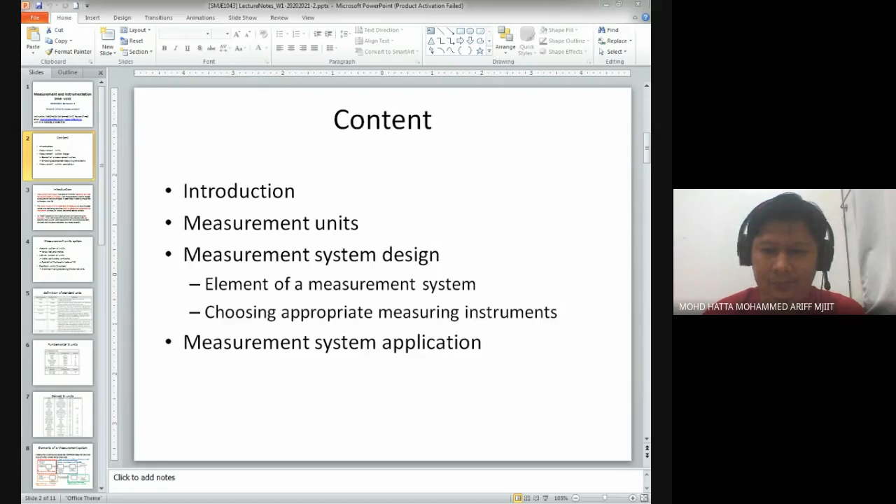Okay, as an introduction, here it says that measurement techniques have been of immense importance ever since the start of human civilization. I agree with this statement, and I believe Omer also agrees. It gives the example of a ruler; it's a very traditional measurement technique. When measurements were first needed to regulate the transfer of goods in barter trade in order to ensure that exchanges were fair. I agree, doctor.

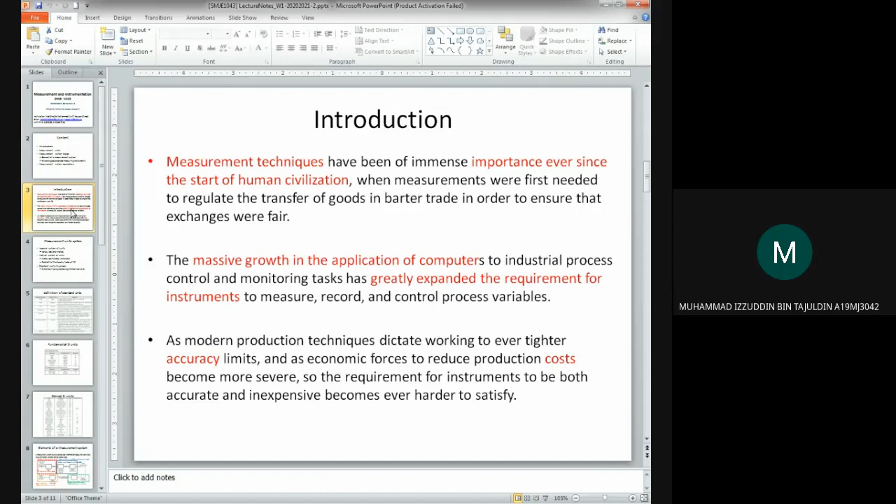Do you know what barter trade is? Yes, I know that. How is it performed? You know, when we try to buy gold with fish, right? Yes, you switch things, doctor, so you can get that other thing. You give someone fish and you will get gold. Is it a fair one? No, I think maybe not. You will give that person maybe the same value of things. The trade should be done in a fair manner.

But I think for a measurement system, if you try to measure people in terms of their height, in terms of their weight, we have a fair instrument. I mean, to know what is the weight and also what is the height of a human or any items that we try to measure.

Okay, next point. The massive growth in application of computers to industrial process control and monitoring tasks has greatly expanded the requirement for instruments to measure, record, and control process variables. Of course, with computers, we can do a lot of things. We can control our measurement system, and we can control our instrument. We can control in terms of monitoring as well. So the growth of computer technology has benefited measurement techniques and also

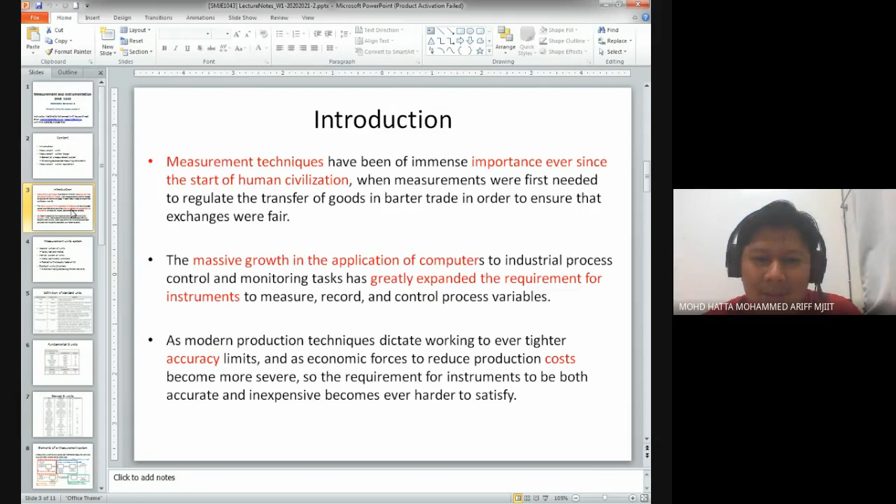instrument technology. And as modern production techniques dictate working to ever tighter accuracy limits, and as economic forces to reduce production costs become more severe, so the requirement for instruments to be both accurate and inexpensive becomes ever harder to satisfy. I also agree with this statement. It's difficult to satisfy people as well as satisfy the requirements of, in this case, measurement.

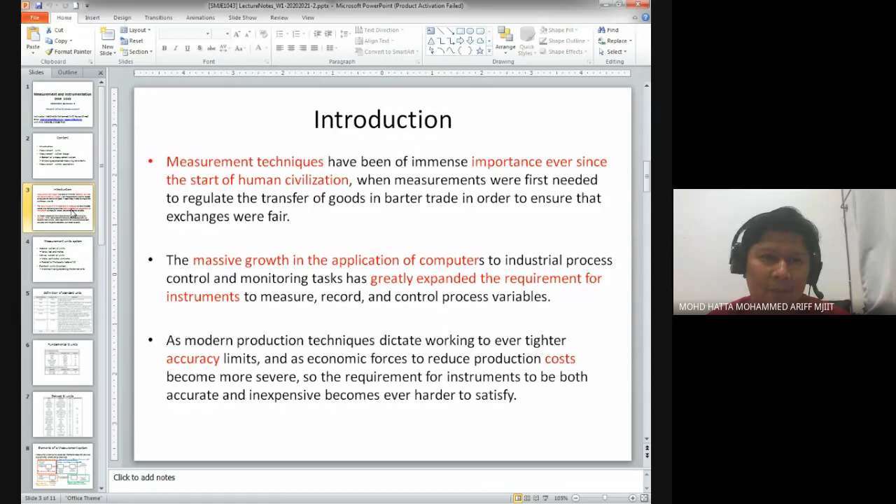So there's a trade-off between cost and accuracy and also technology as well. So you need to balance, you need to compromise all requirements in order to get what you need in your measurement as well as in your instrument. So you need to have something which is accurate and at the same time less expensive, so that you can have better performance as well as resource sustainability.

Okay, measurement unit systems. Last time, if you look at, I think not last time, nowadays also, the imperial system is used widely, and I believe in the US they like to use yards, feet as well as inches, and I think in the UK as well.

For the metric system, we know that we have meter, centimeter, millimeter, measurements related to the base factor of 10. For example, if you would like to have a measurement of 1 kilometer, that means 10 to the power of 3 meters, right? So in the metric system, we usually use a factor of 10, like kilo, centi, milli, something like that.

And for the standard unit SI, since we have two types of unit system, one imperial and one metric, we also have a standard unit system known as the SI system. This system was created to avoid confusion in expressing the derived units. Normally, in our course, we try to use the standard system. For example, if you try to measure weight, we're not going to use pounds, we will use kilograms or grams in our SI unit system. You need to go back through this definition later on based on the materials that I will provide later.

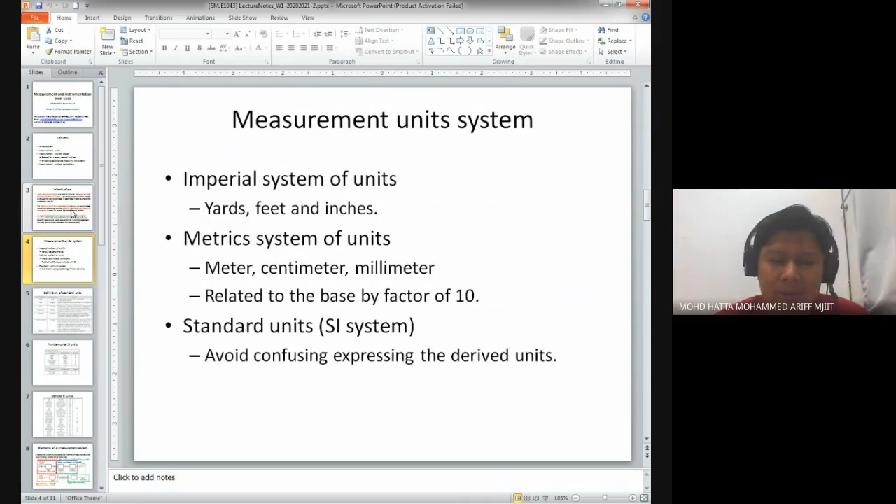Right, this is the definition of standard units. If you look at length, we have meter; mass, kilogram; time, second; temperature, degree; current, ampere; luminous intensity, we have candela; matter, we have mole. So this is the definition of it. So later on, maybe you should read all this and try to understand or remember what is meant by kilogram, or what is meant by length, meter.

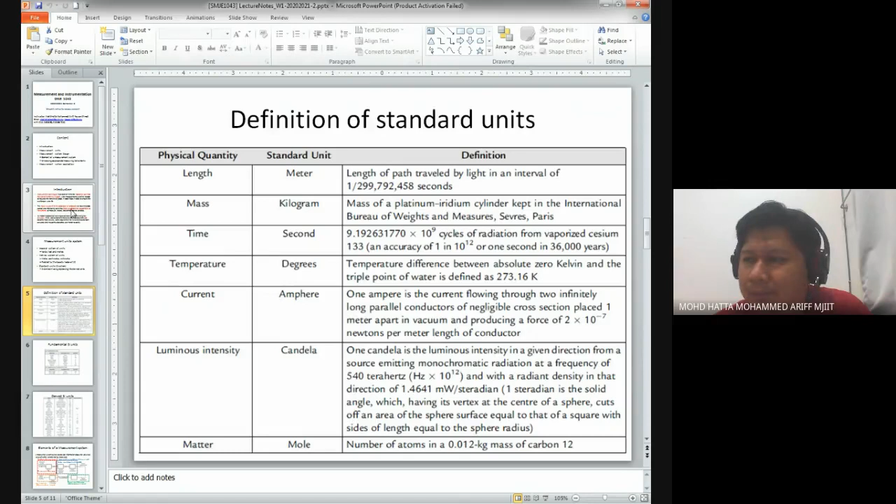Okay, also for the fundamental SI units, we have quantities, standards, as well as symbols. For the supplementary fundamental units, we also have plane angle with the unit of radian, and also solid angle, steradian. And normally the symbol should be like this, rad or sr.

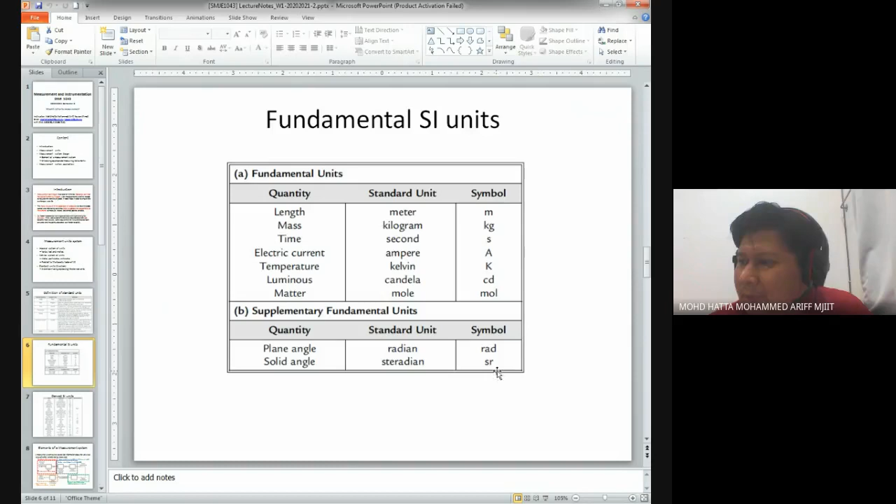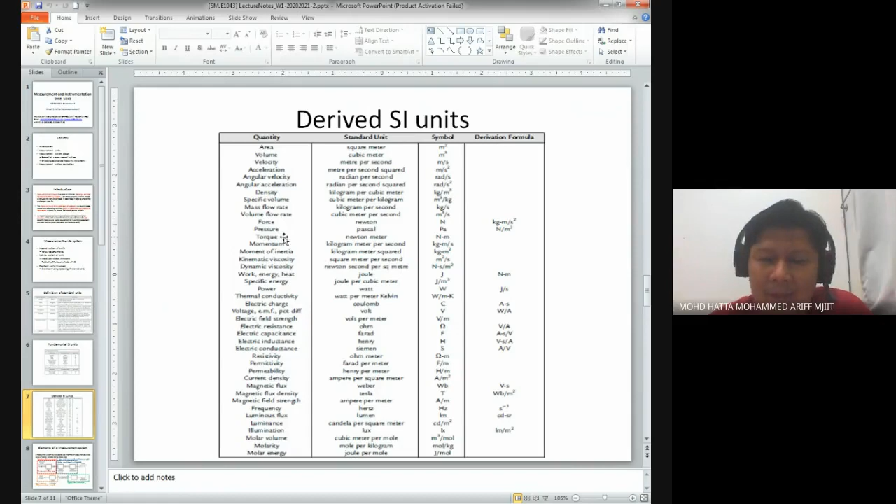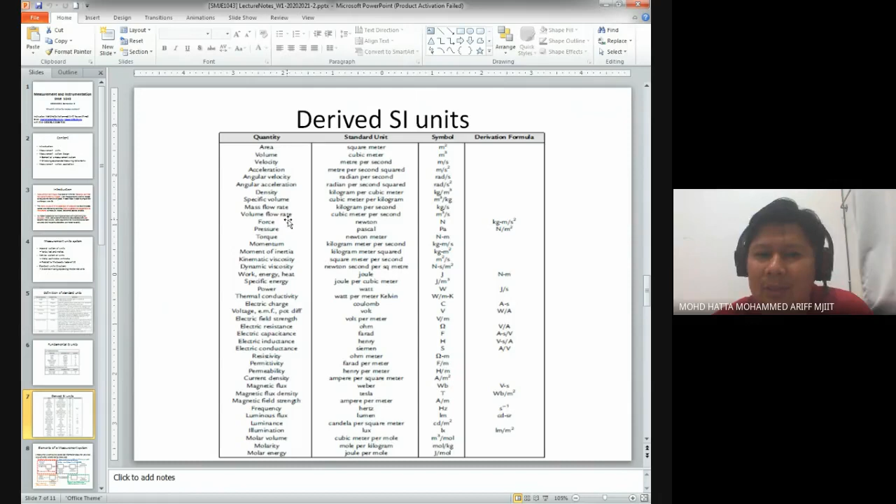These are the derived units of SI. We have area, volume, velocity, and so on, until molar energy. You don't need to remember all this, but you need to know that this list gives examples of derived SI units. So you should know that area, volume, velocity, and acceleration are considered derived SI units.

All right, elements of measuring system. Basically, for a measuring system, we have 4 basic elements. The first one is the sensing element. The second one is the signal conditioning system. The third one is data transmission, and the final one is data presentation elements. So these 4 elements are connected in series in order for us to get a correct value of our measurement, or in order for us to measure quantities.

And later on, you know that for these sensors, for example a thermocouple, where we try to sense the heating in the environment, we need to do some signal conditioning, meaning that we need to process the signal collected from our sensor. So to process the signal or the data from our sensor, we should have another block which is known as the signal conditioning block. In the signal conditioning block, sometimes we have a variable conversion element.

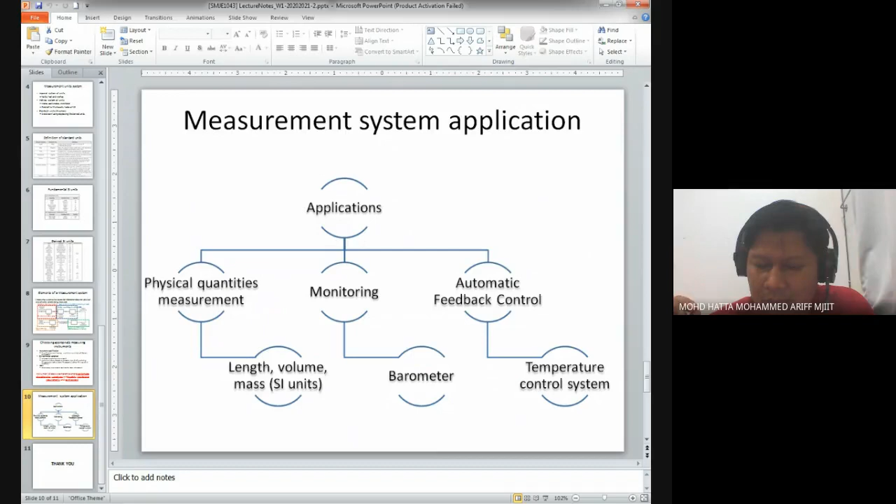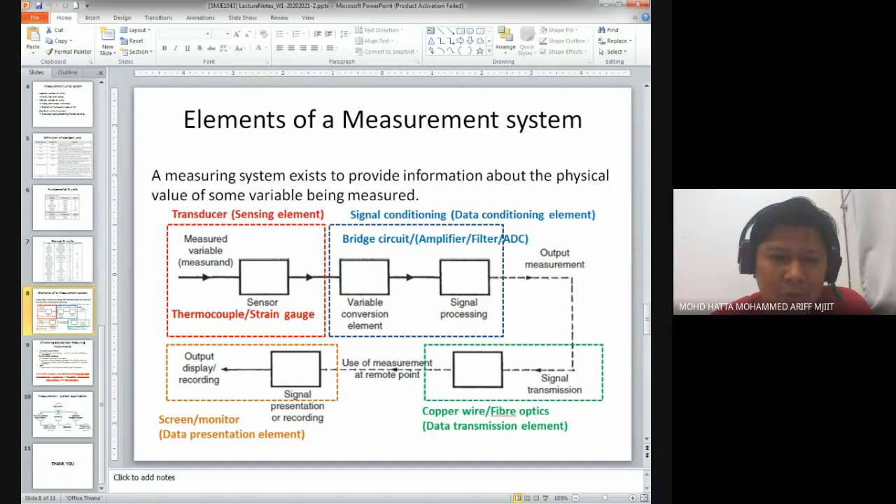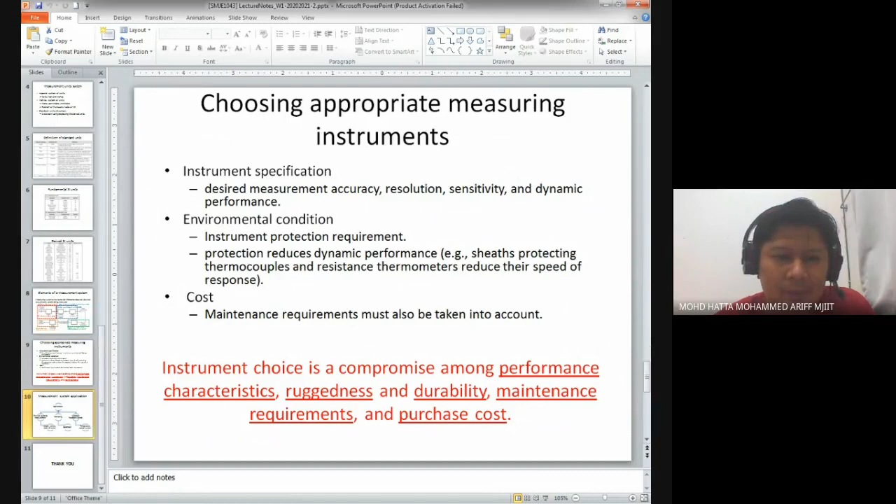But I believe in this class, the thing that you need to take note of is this slide, how do we choose an appropriate measurement instrument, as well as this slide. If you remember, I explained these two slides in detail. So please make sure you know the content of these slides, and maybe you can also do some background reading on that matter. Right. I believe that's it for week number 1. I know it's very brief, but I really encourage you guys to do some extra reading based on the textbook that I mentioned in my slide, as well as the e-learning material that I will post later on. That should be some starting point in terms of getting the information of today's lecture.

All right. Any questions so far? No, doctor. Thank you. Terima kasih. Terima kasih, Omar. Well, you can speak Malay.